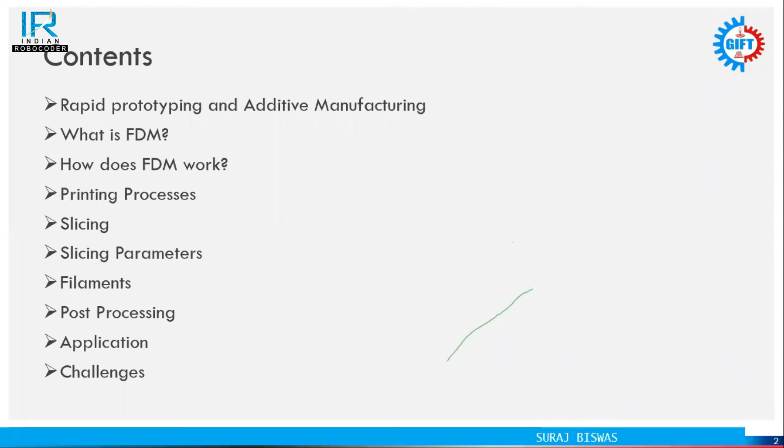So these are the contents we are going to discuss here. So you can have a brief glance on this. So first we'll see. So first one here, this is rapid prototyping and additive manufacturing process.

So first of all, before going to the topic, we can just get the concept of manufacturing process. Now, in this current era, there are two ways of manufacturing process: one is additive manufacturing process, one is subtractive manufacturing process. And subtractive manufacturing process is a traditional type of manufacturing process where we bring a bulk of material from the ore and send it for refining. Lots of processes are there. After getting the fine material, we put it through a number of processes to make a dedicated product as per our requirement.

But in case of additive manufacturing process, the material we are using is not shaped by cutting or removing material from the bulk material. Here we add material in different ways, like we can add line by line or layer by layer. By adding that material we can achieve our final product.

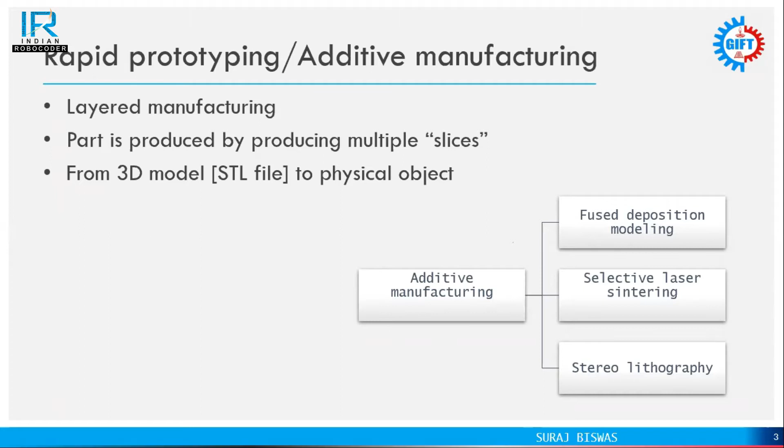So here the additive manufacturing process can be in three ways: fused deposition modeling, that is our main area of discussion, selective laser sintering and stereolithography. These are another vast area of discussion. So now see, these are the types of additive manufacturing process. Generally, the additive manufacturing process can be called the 3D printing manufacturing process. So these are the several types of 3D printing manufacturing process.

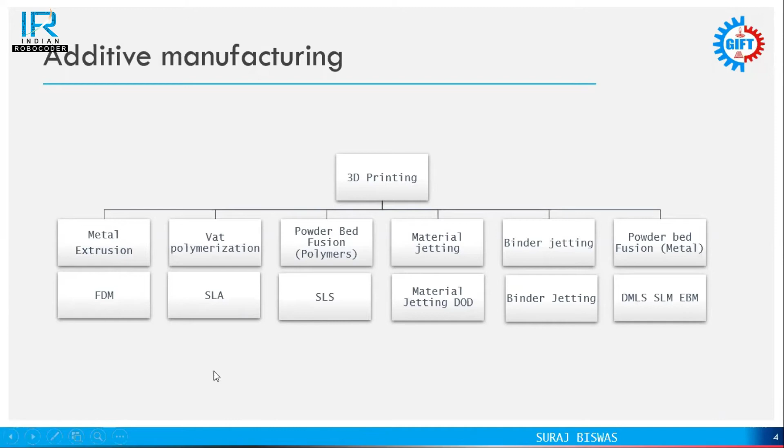We can go briefly through these several types of manufacturing process, but we'll focus on our main topic, that is material extrusion 3D printing process. So first of all, we will see the vat polymerization, that is SLA 3D printing process. So this is the vat polymerization or the SLA, stereolithography apparatus. That means whatever product we want to manufacture, first of all we need to go for the designing of that product, and a lot of steps are there. Regarding the steps I will discuss later.

But what is this vat polymerization? Vat polymerization means there are liquid resins, you can see here. So this is a special type of resin. When that resin comes into the interface of UV light, it gets permanently solidified, and by that solidification of the liquid resin, we can achieve the product. But the challenge is we need to put that UV light in a particular path or particular meshing of the object, so that we can get our desired product.

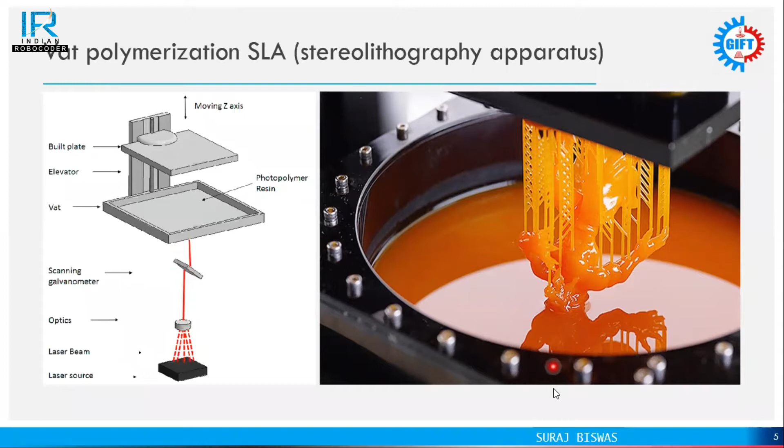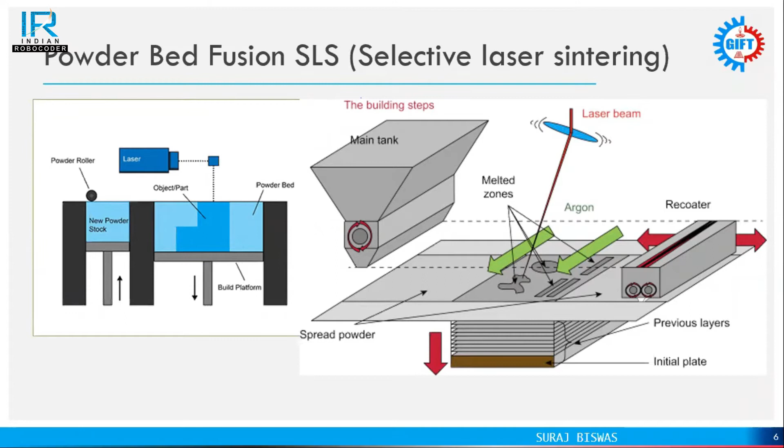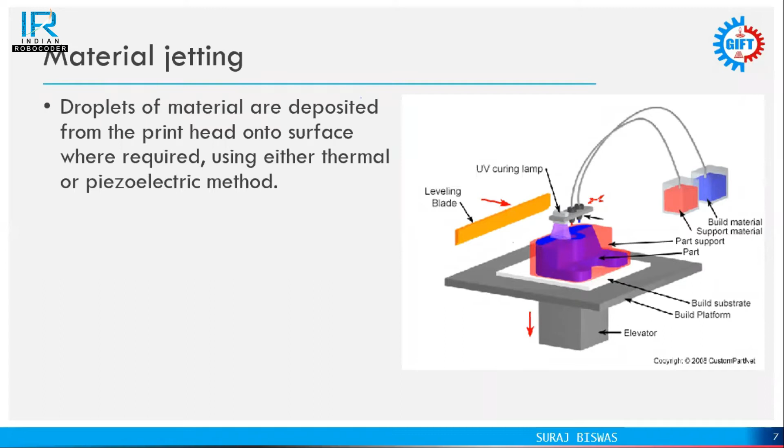Material jetting is another type of 3D printing process. Here, powder material is present inside the chamber and comes into the printing area. But in this case, there is a tube-like shape through which we provide the material, and droplets of the material deposit on the previous top layer of the product. After putting that material, another source of UV light is present, and that UV light or laser melts the material, and once melted, it binds together. So there is formation of a small solidified layer, and by continuously repeating this process, we get our product.

So this is binder jetting. Here there is use of two types of materials: one is the main material, and another is the binder material. The main material, as in selective laser sintering, is a powder material. But there is another material to bind each layer together, so by binding that powder material layer by layer, we can achieve our final product.

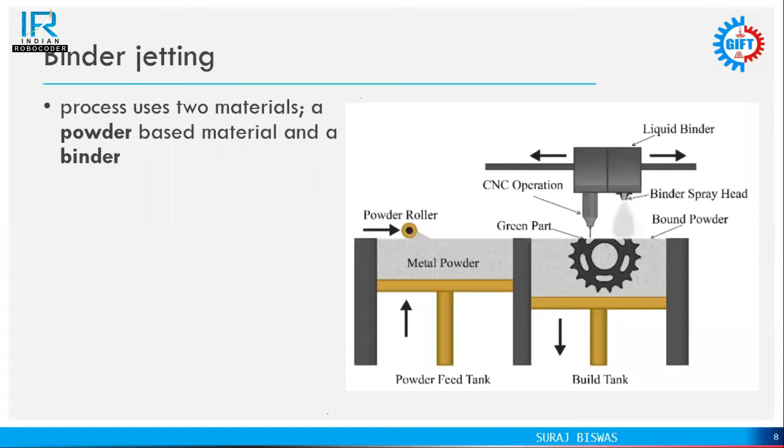So this is powder bed fusion, and there are several types. You can see direct metal laser sintering, DMLS, and SLM, which is selective laser melting. EBM is electron beam melting. Direct metal laser sintering is exclusively used for metal generally, and in electron beam melting there is a source of a vast amount of electrons to heat the material. But in laser sintering, the source of energy is laser, meaning light, which heats the material. In this case, the electron beam will melt the material. This is the only difference between the source of energy or heating element.

So there is not much difference between DMLS and SLM. We can see these are very similar types, just under different names.

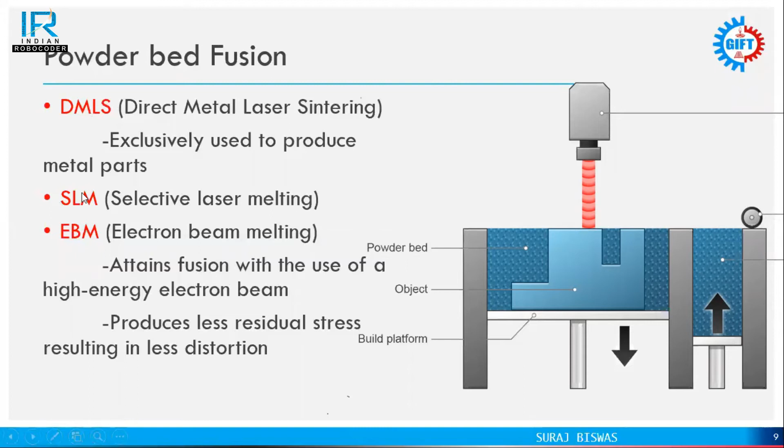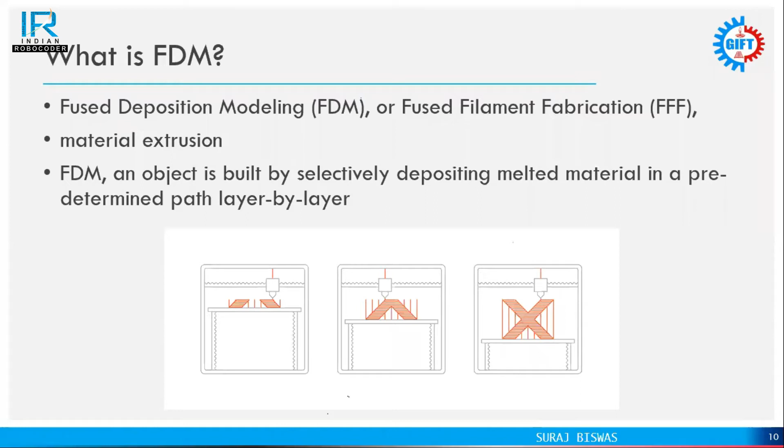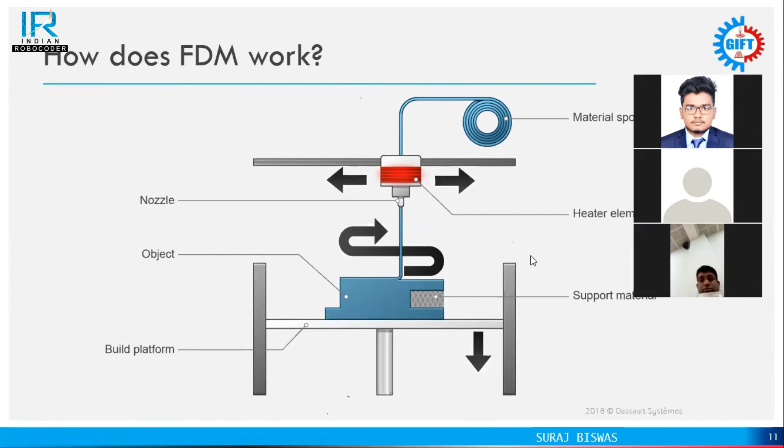So here the nozzles and heating element are just connected together. The heating element is the main source, containing the resistive heating element type.

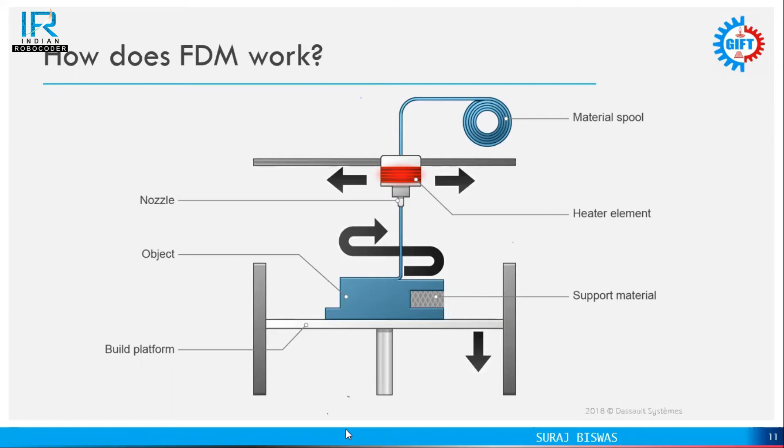Okay, so this is a little bit of what I told before. So here we see the printing process. There are several steps in this process which we will discuss here.

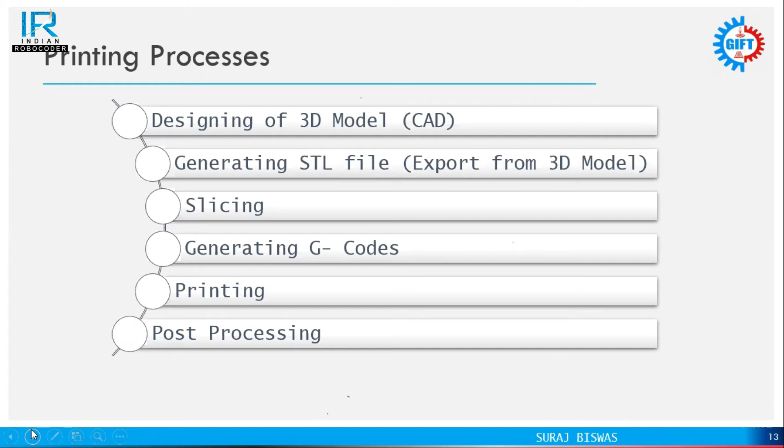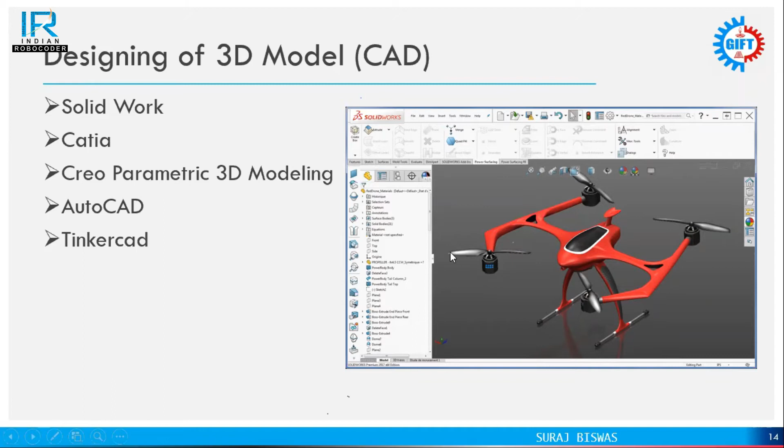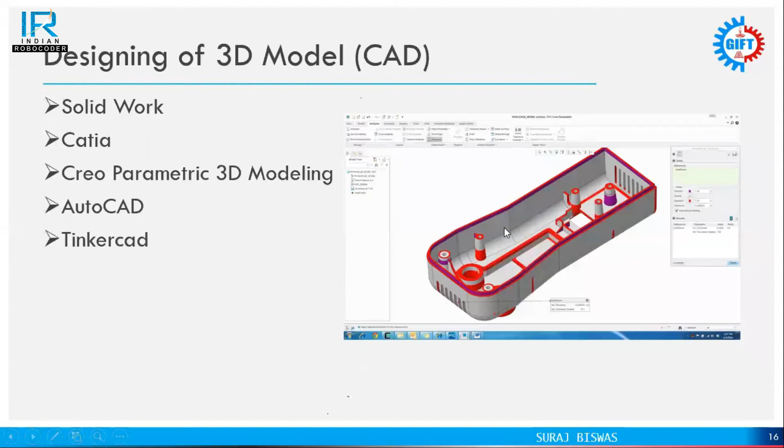There are several software we can use to design: there's Creo, AutoCAD, Tinkercad. This Tinkercad is a very useful software. With this software, we don't need vast skill regarding 3D modeling. Just have knowledge regarding the shape, the name of the element, and we can get that 3D object. No need to require vast skill regarding measurement.

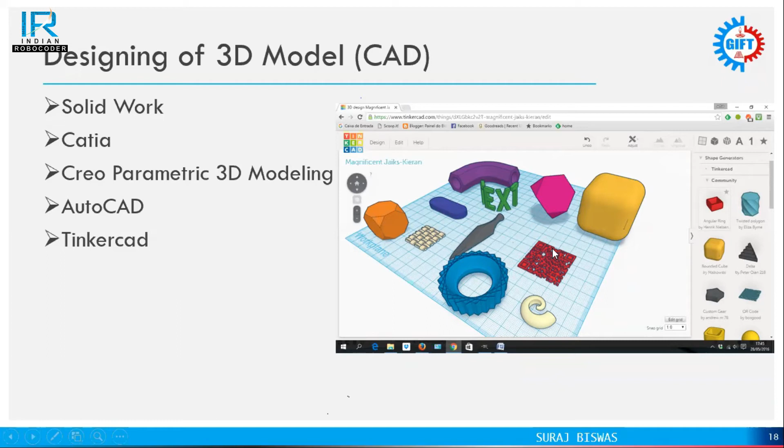Engineering drawing as well, with this Tinkercad, a kid can also design a 3D model. So you can see this is a very simple software compared to other CAD modeling software. This Tinkercad is a free source, and anybody can use it in a browser, no need to install the software.

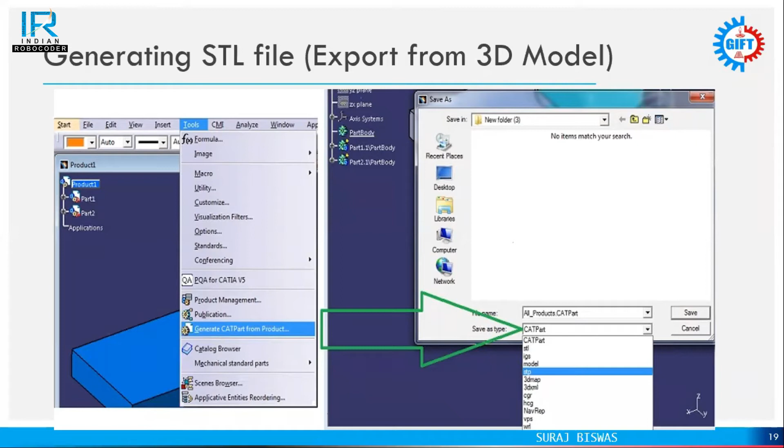So here you see the generation of the STL file. The STL file plays a vast role in making a 3D printing object. Before going to slicing, the STL file plays a very vast role. To convert a CAD model into an STL file is very simple. We can just export that same model. What we want is to just convert it to STL file. Before saving, we need to click on the save as type, we can change it to STL file. So by that we can achieve the STL file of the CAD model.

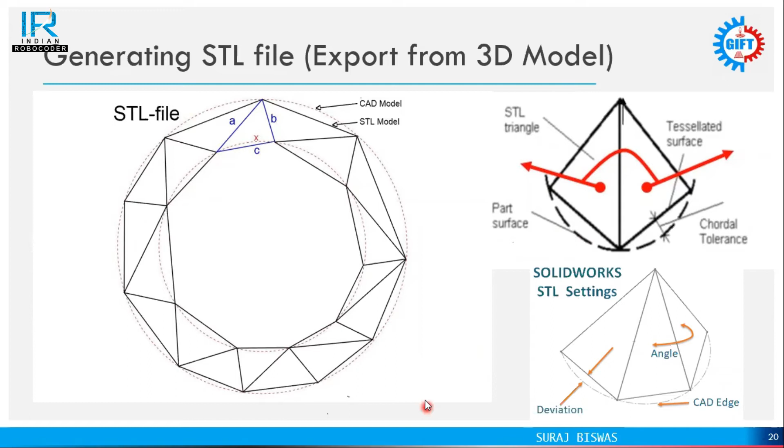So slicing is another main step for the 3D printing process. Slicing, as its name suggests, means cutting into small pieces, like slicing fruits or vegetables. In 3D printing, the object is sliced into very thin layers, meaning the 3D printer will move layer by layer. Which layer the printer should move first, and which layer second, is defined by this slicing software.

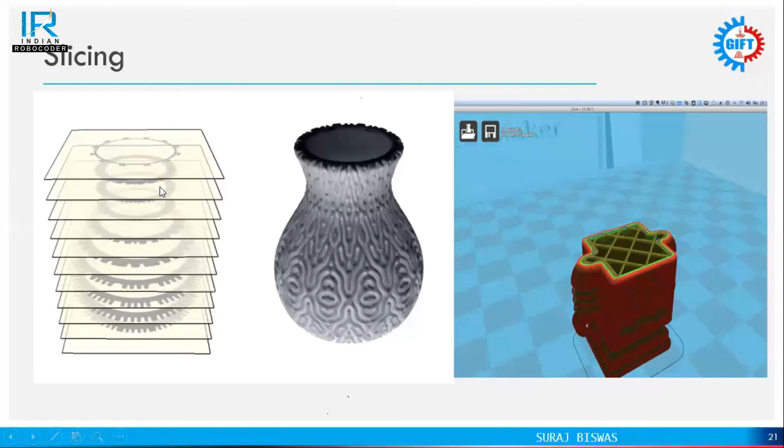Slicing also defines the printing time, layer height, and there are several parameters for slicing. So you can see this image of slicing on the right side. This is the Cura software, a free software for slicing.

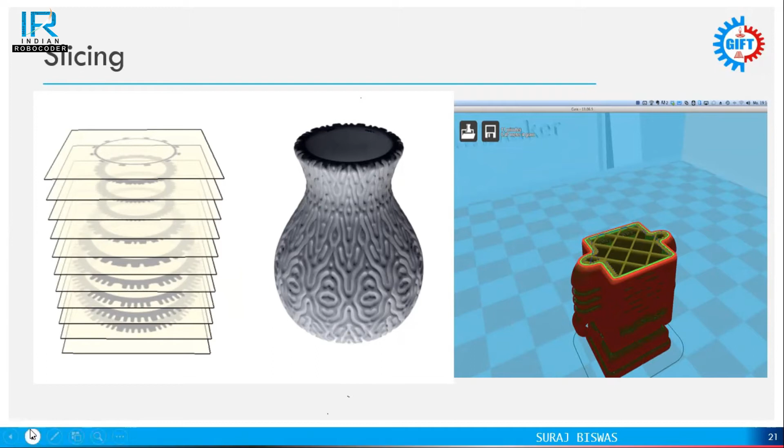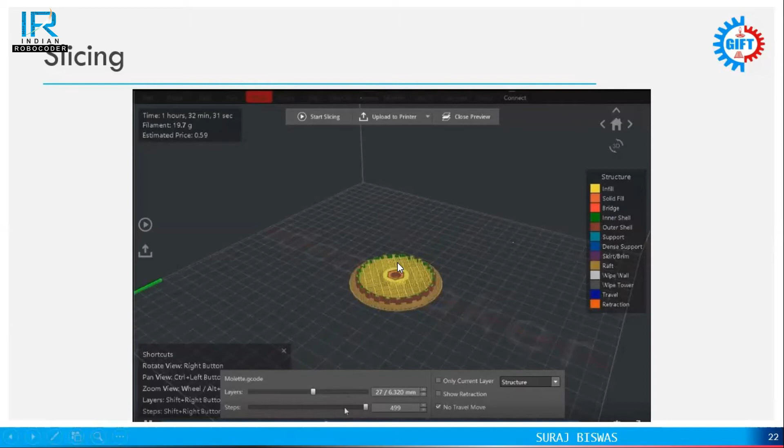This is another slicing software called IdeaMaker. We can see this object, which is a 3D model of a gear. After gear modeling, we convert it into an STL file. After getting the STL file, we give it as input to the slicing software. Then we go for different parameters to set how it will print.

Shell means the outer layer of any object - how many lines, how many layers should be built with shell material. That means removing the material from the inside of the object and only considering the outer layer. That is called the shell. How many shell layers we need will be mentioned here - for example, two layers will print the outer shell.

One by one, these parameters play a very vital role - the first layer height, how much the first layer height should be, and we can see that later. Here extruder parameters are there: extrusion width, retraction, which also plays a very vast role, and coasting.

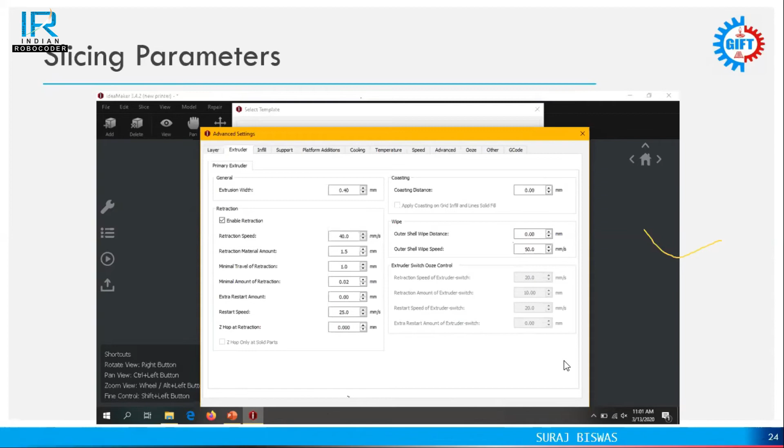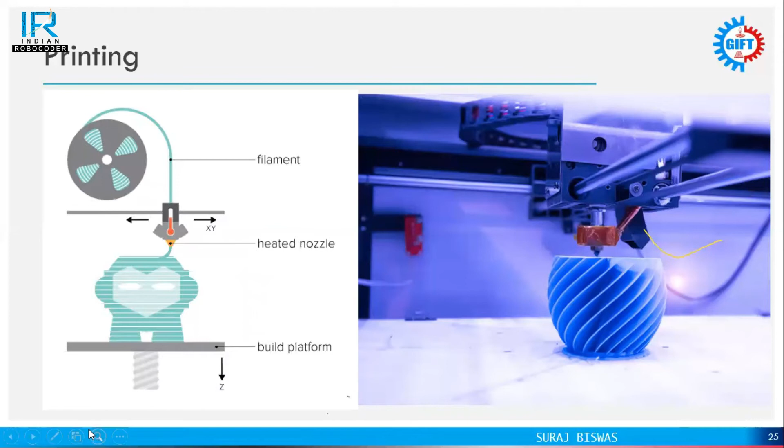I think both the thermal as well as the mechanical pressure. Yes, sir. First you have to melt it. I think first the powder has to be melted and then pressed. Okay. Sir, this is not the powder. This is the solid material, solid filament, a solid thread-like structure. Melt flow means after melting it will flow.

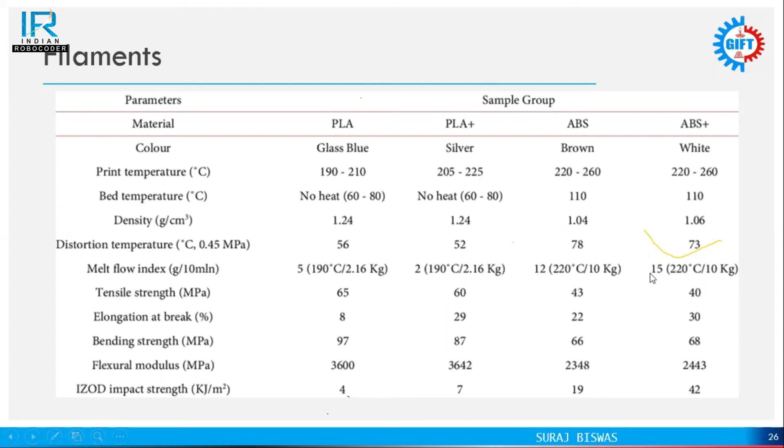Yes, sir. I don't have that clear knowledge regarding this. Actually, I have not used this term before this session. Okay, carry on. I will go for this term in my 3D printing machine. The rest of the parameters are well understood, yes, sir. Okay, continue.

So here, this is a picture. I've shown that there are four filament types and their whole parameters. We can see the 3D printing filaments are purely 100% virgin materials. No recycled materials are used for the 3D printing filament. Generally, the 3D printing materials are also RoHS certified. RoHS certified means it will not affect the environment. I'm not able to remember the full form of that word.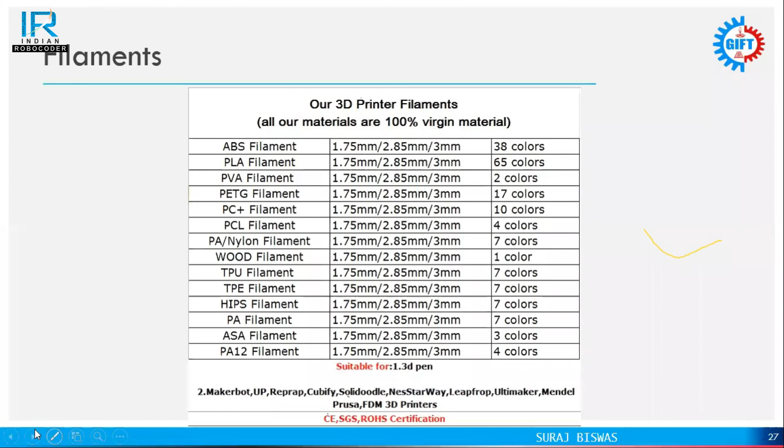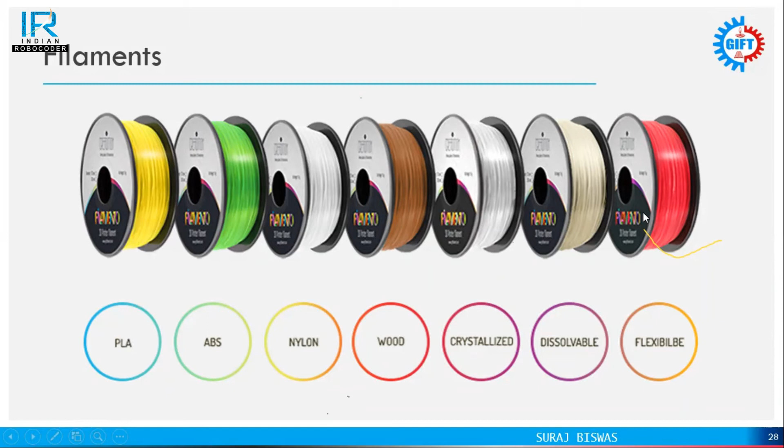So that is not toxic. RoHS, restriction of hazardous substances, that is the RoHS full form. So the filament comes in several colors. We should not get confused between these colors and the name of the filament. For PLA material we can have black color, red color, any type of color. We should not go by this color coding for the material name. This is only for the graphics.

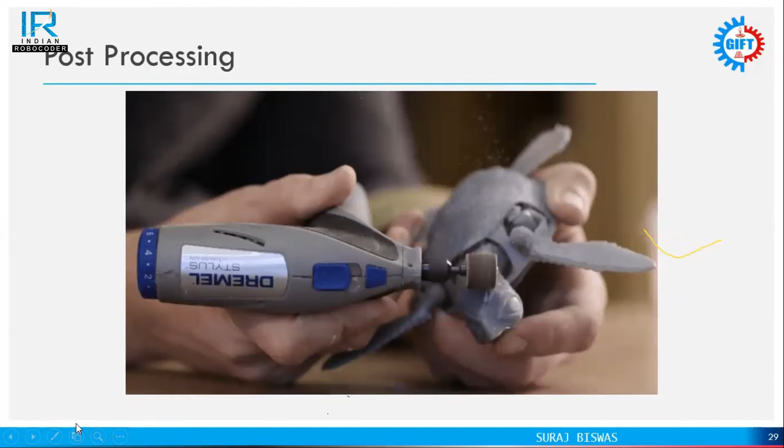So here we see the post processing. After the 3D printing process, each product we get has several roughnesses on the surface because printing takes place layer by layer. The roughness also depends upon the layer height, printing speed, types of filament, and temperature of the filament during printing. So the roughness of the object depends on these parameters.

When the printing speed is high, more than 100 to 150%, the printing quality definitely decreases. When we decrease the printing speed to 50%, the surface finish definitely improves. When I require a number of objects in a shorter time, we go for a fast printing process, so several roughnesses form. For that we need post processing.

So here we can see a small grinder. We grind the surface of this object. There is a special type of knife, an ultrasonic knife, also used for cleaning extra parts. There is support material, which I have mentioned. So you see the next image.

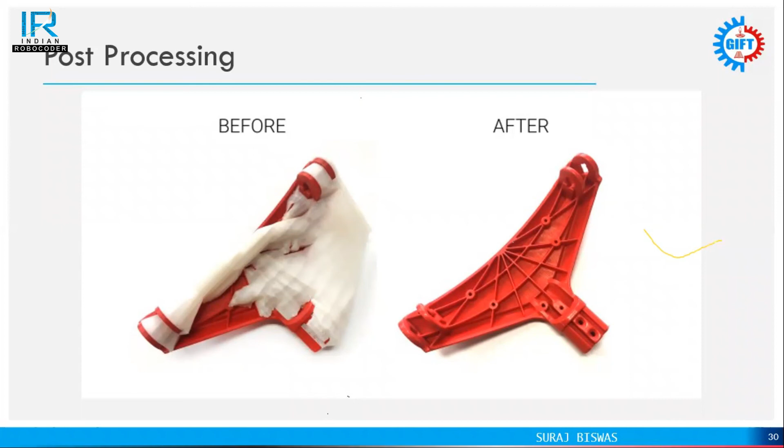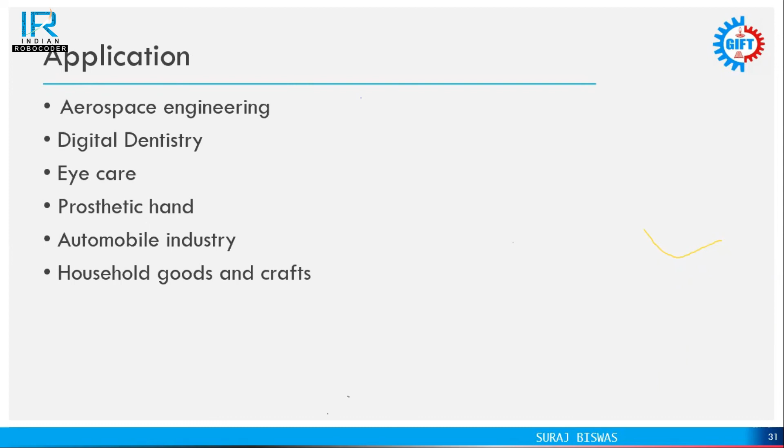So by scanning any object, we can get that object in our system, and after that we can print directly. That means duplicating of any project or any product.

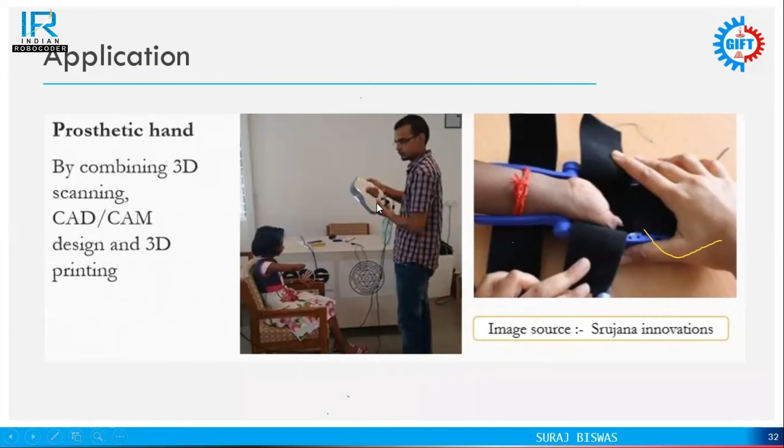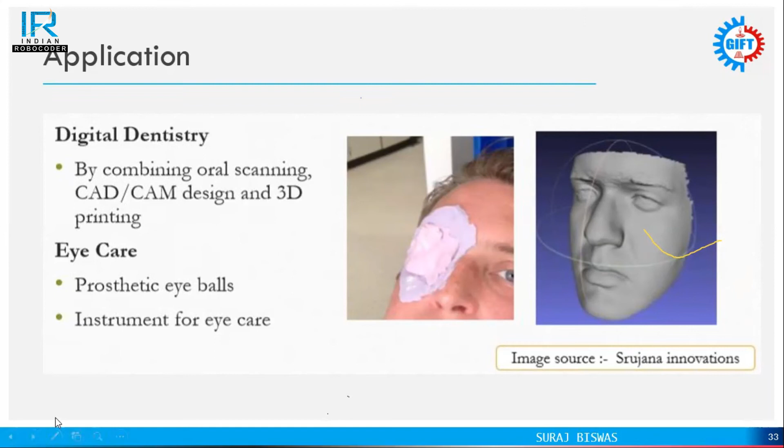So to print any object, it is much costlier than other types of manufacturing process. But we can go for the 3D printing process for those products we are unable to manufacture from other manufacturing processes.

And another is quality of print. For the last 20 years, researchers have continuously been increasing the quality of printing. First of all, the invention of FDM was there. Then to increase the surface finishing, we go for VAT polymerization. VAT polymerization gives very fine surface finishing, much better as compared to fused deposition modeling.